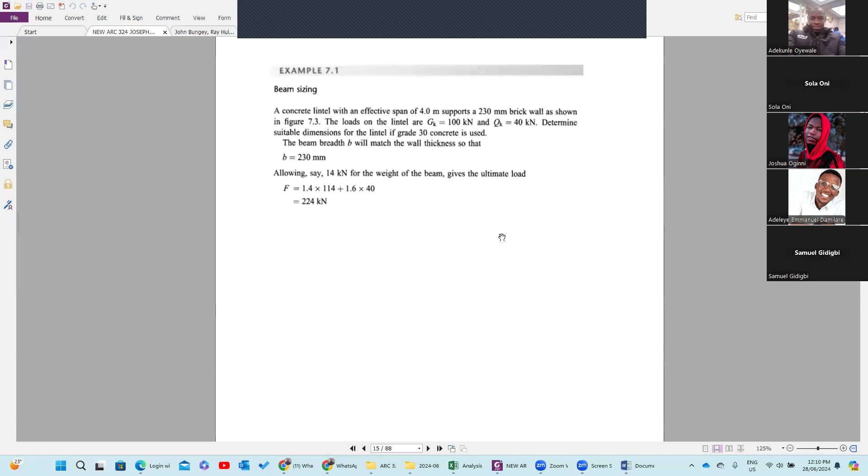Which calculation, for this particular question? For the cost? For the exam? Which calculation is much, if I may ask you? No sir, we are talking about the old textbook, not...

What? See, there's what we call curriculum. Are you getting me? Yes sir. In that curriculum, it is my duty to make sure that every aspect is covered. Are you getting me? Yes sir. But the...

Calculation - if you don't understand the calculation after reading it, that is why I'm trying to do this revision for you, because for a novice instructor it might be difficult for you. That is why I'm taking my time to open your BS 8110 to show you where those conditions are itemized. Are you getting it?

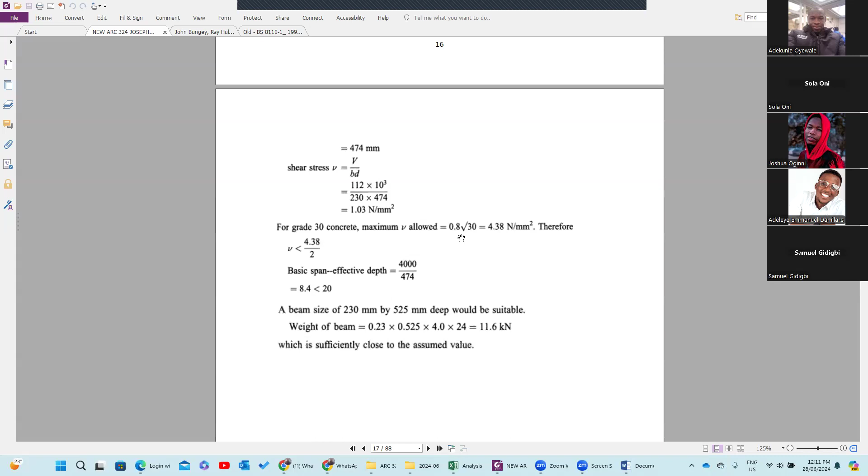The simplest calculation you can ever see in structures is for a simply supported beam. This is what I'm going to go over now. This particular one - that's the simplest calculation you can ever see in structure. Are you getting me? And we need to...

It's impossible for me to just ask you what is column, what is beam. It is impossible for me to just ask you a simple question like that. In structures, you must calculate.

So where should we focus on? The easiest among the calculations are what I'm just explaining to you, because if I should go to flat beam and those thick calculations, it might be difficult for you. But I have to just explain to you the procedure. Now when you read it, try and do some calculation based on what I've explained to you.

Do you understand? The example in the notes, can you try it? Can you do it? Can you solve those things? Can you close your book and solve it again? If you're able to do that, then I think the knowledge has sunk in somehow.

However, there's no way you will do without this particular formula, which is K equals M over BD squared FCU. It's impossible for you to do structures using BS 8110 without doing this. So you understand, that is the foundation of reinforcement in beams. And when we do the same thing, applicable to slab - beam and slab have almost the same condition. So you just have to know this.

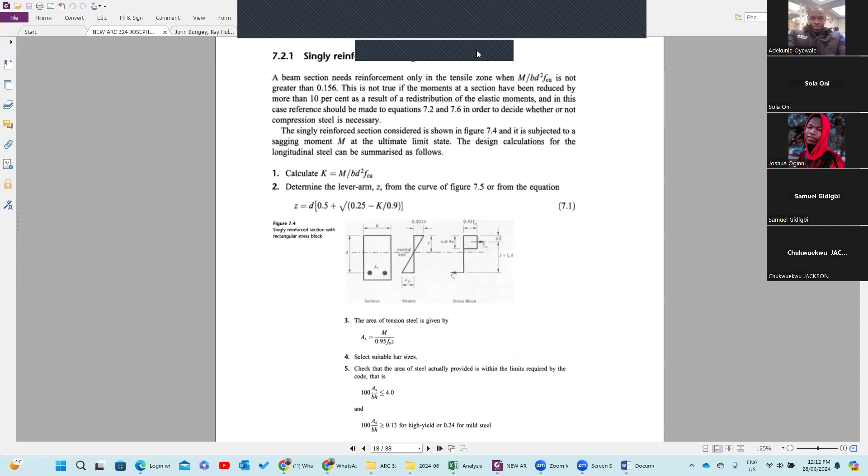Sir, please sir, the calculations are getting too much and are getting very, very confusing for us. Which one is too much there? Sir, I won't lie to you sir, if we have an area of focus, maybe a single question that is going to come out, we will be able to calculate and digest that one, because all of these things are a lot inside our head.

Bringing formulas, going to another PDF to check it out, coming back again - we can't really relate. We need a focus, sir. We are not structural students, we are borrowing this course. We don't understand it, I'm serious here.

So sir, please, if we can have a focus that, okay, this will focus on this, we will calculate and digest that question and we'll be able to bring something out, sir. Please, sir, please, we don't understand this. Hello? Yeah, so that you won't have problem - that is why I'm going over this for you.

Because I've given you the note already, I've explained this for you in class already. Why I'm giving this to you is so that you won't have problem, so that those people that missed the class can see it too, because we were about 9 in the class. That is why I'm revising this for you.

It's not convenient for me, it's just a sacrifice I'm giving into class. You understand? It won't do me any good if everybody in the class will fail. So you understand, but however, you see how I can make the course easier for you.

Forget the mindset that this course is hard. It's not hard, it's very simple - it's just a procedure, that okay, if you want to design this, this is how you calculate the weights, this is how you know the size you want to use, which is also applicable for what you will need on site. You cannot construct a building without having a lintel in your building, and you cannot do without concrete.

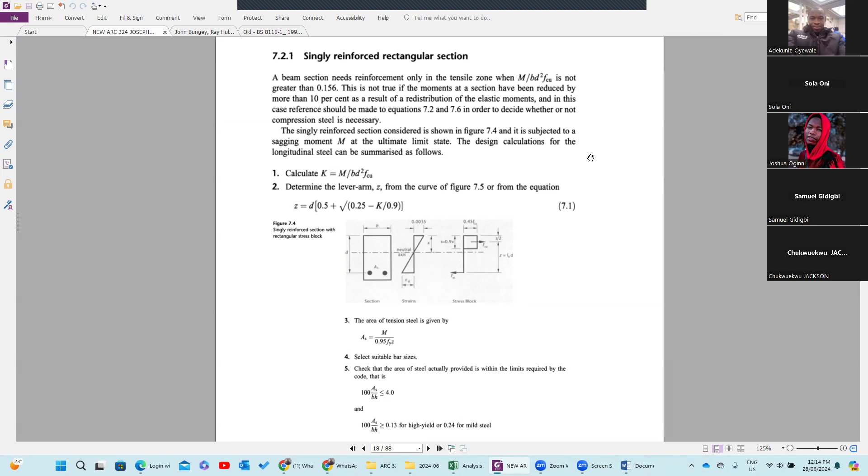You will need to know how the weight of this concrete is being arrived at. What if you go to the site and somebody just says, okay, provide 16 number bars of so diameter? If you don't know how to calculate it, how will you be able to vet it? How will they be able to put you as the quality assurance personnel to vet what everybody is bringing?

You should be able to know some basic things about all these things. So with this knowledge, there's no way you want to calculate for it and not know the amount of reinforcement that you will need. You don't need to panic. Maybe they say we don't have 32mm diameter bar in the market, you don't need to panic.

This course will let you know the possibility of using another reinforcement size and what numbers you need to provide. All the loadings on your structure - how will you know if this structure is being abused? If you don't understand the loading condition, how it is being loaded, how will you be able to distribute the load on each of those members? You are the designer, you should have the knowledge of what everybody is doing - the structural engineer, the builder, and the architect.

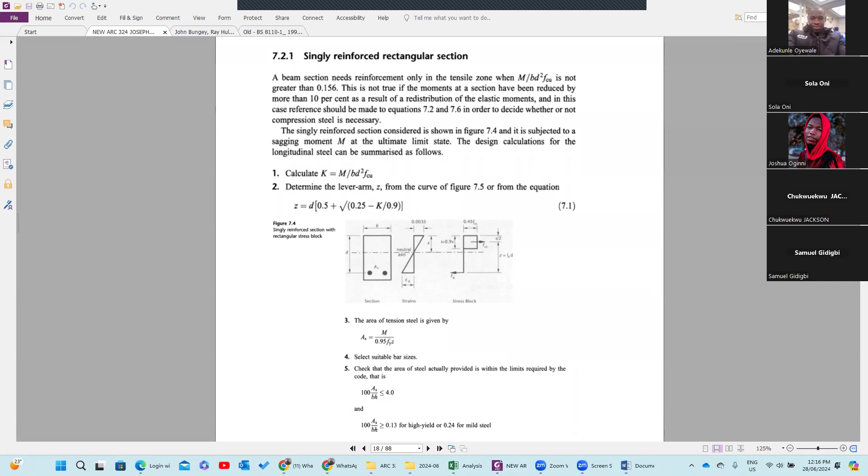That's why I have to put this to you. I can't just carry some calculation and give you some solutions - I'm not helping you that way. So you're not giving us solutions? Sir, okay, I'm actually saying that. So this formula, how do we tend to go about it, sir?

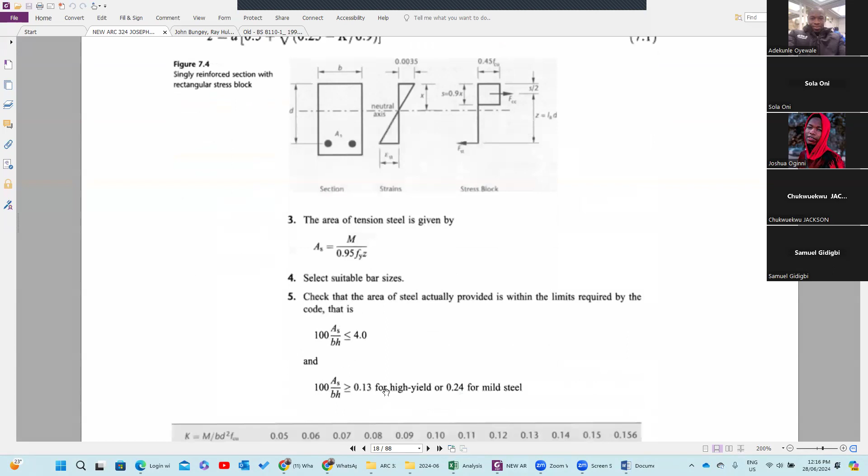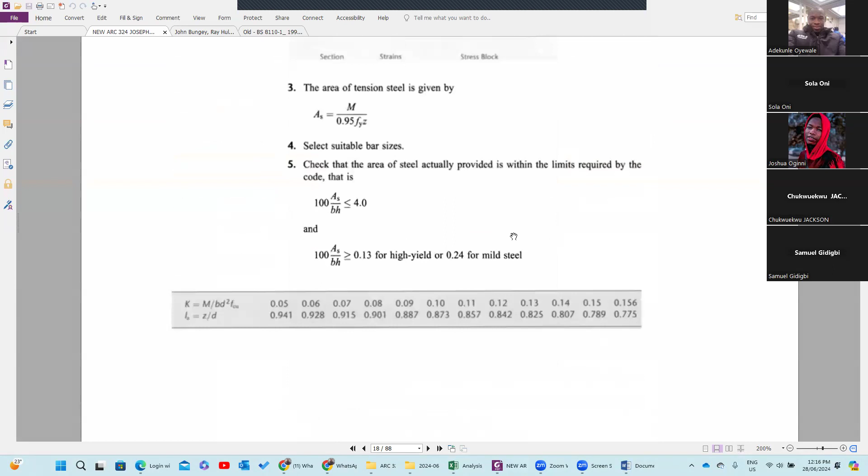This particular formula, number 1, number 2, number 3 - you should have it at the back of your mind. We should know that one. If on this one, you don't need to open a textbook before you know this, you must know it, you understand? These three - once you know these three, any other one that might be difficult, I will make provision for it, provide the other one for us in case you need to use it.

Now I want us to look at this example before time runs out.

Even look at the number of people in the meeting - it's negligible, almost 6 or so. And you can see, we are just 8 in number here. So you can see how serious your class is. And you are expecting area of concentration - me, I'm not giving area of concentration, I will do calculation for you. If you like, concentrate, if you like, don't concentrate.

So what do we need to do? We want to look at the tension reinforcement that is needed. How do we go about it? The first thing is that you calculate your K value, which is M over BD squared FCU. When you calculate it, whatever value you have, you will cross-check whether it is less than 0.156. If it is less than 0.156, then you know you don't need compression reinforcement - that is, it should be singly reinforced.

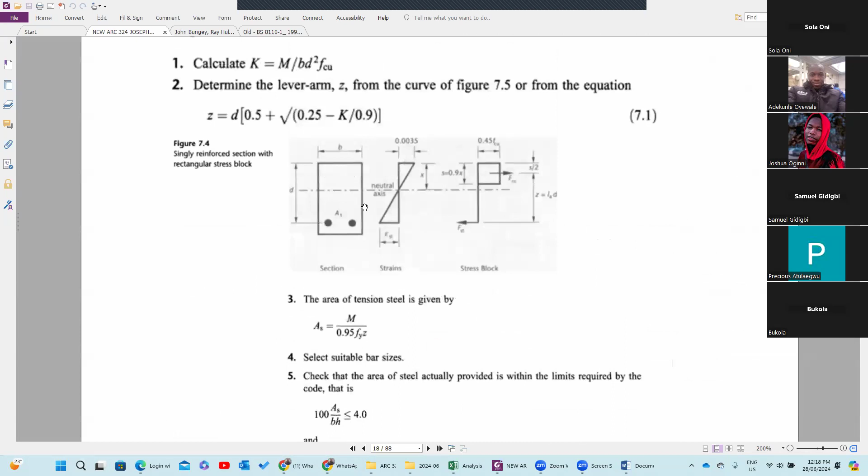Now this Z value - which is the formula that I told you - D into 0.5 plus square root of 0.25 minus K over 0.9, this formula. Now you see this Z value, how did they arrive at it? Look at this chart we have here, you can see from here to here.

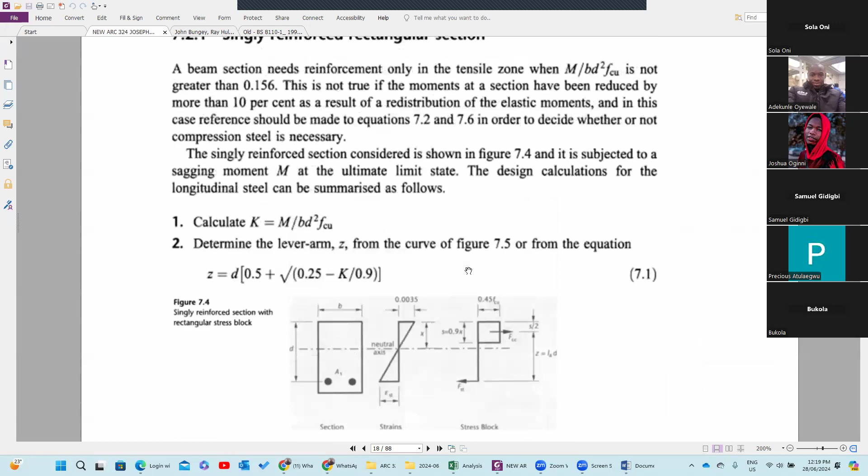So please, how did we arrive at the value of M? M is your maximum moment. If you have a simply supported beam, any beam you have - are you getting me? Let's say you have a beam and it's not loaded initially, you can calculate the weight of the beam, right? I explained to you in the first lecture how you can calculate the weight of a beam.

Before we went on break, I told you how to calculate the weight of a beam. That means you didn't attend the first segment. No, sir, we've been here since, but we didn't recall that. That's the first explanation I did, and I even wrote some things on the board.

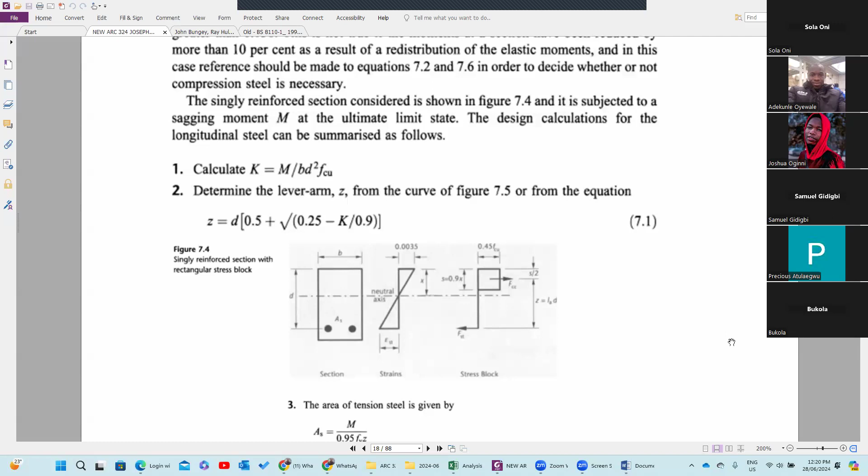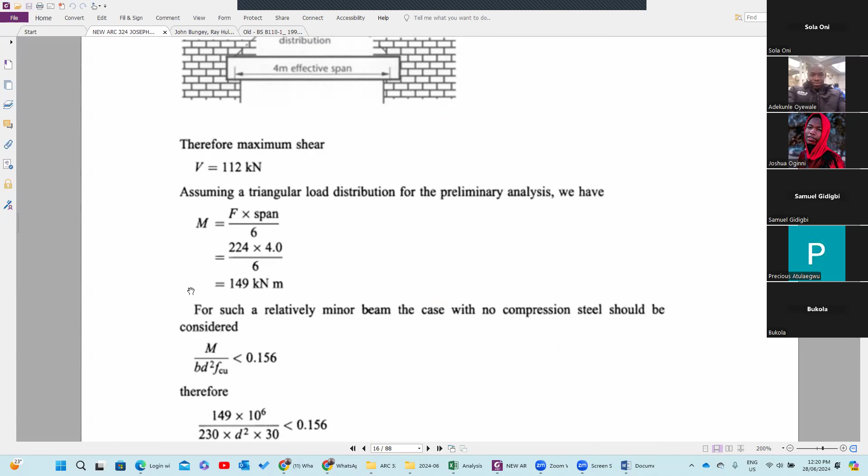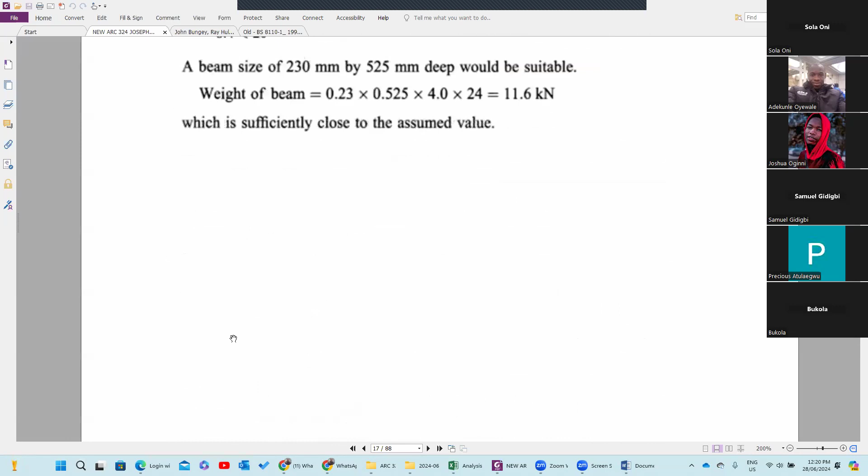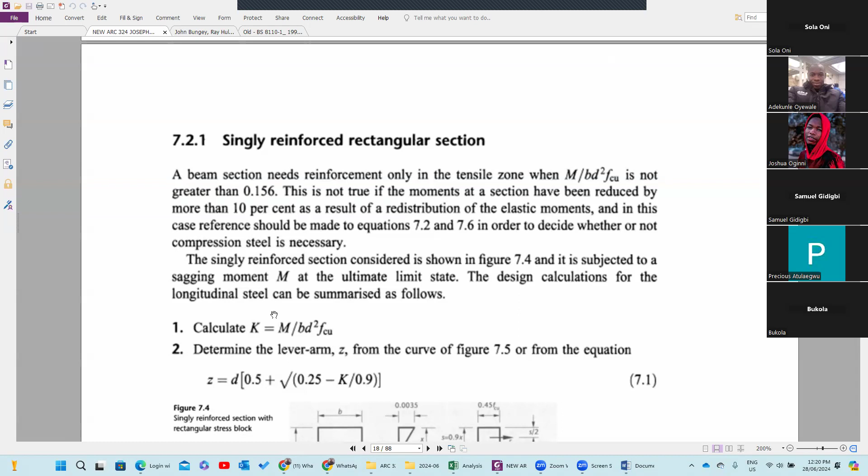So if you know how to calculate that weight, definitely you know how to proceed. I explained how you get your moment based on this, for this lintel. If I told you how to calculate this, and from here how we arrive at this moment, I believe others will be easy for you. That particular procedure, in a situation whereby you're on site and need to calculate the weight of this beam, that's the procedure you follow.

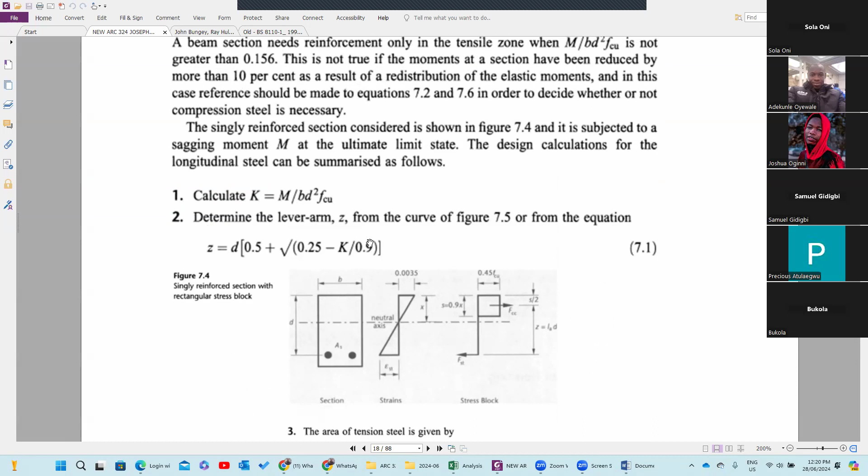You will know how to get the maximum bending moment. For a simply supported beam, you can say WL square over 8, which is always the general case. But if you don't know how to calculate that W, you are wasting your time. That is the first thing I told you: 1.4GK plus 1.6QK. You have to know how to calculate that particular one.

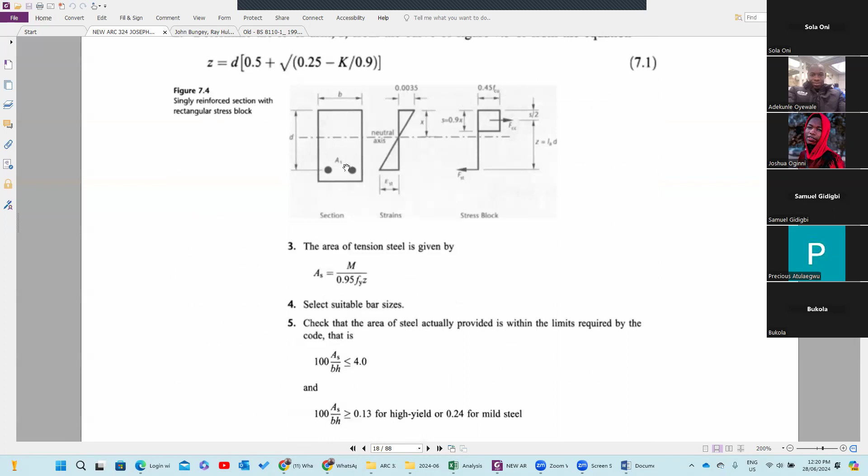All right, sir, we'll go with it. Somebody is asking a question.

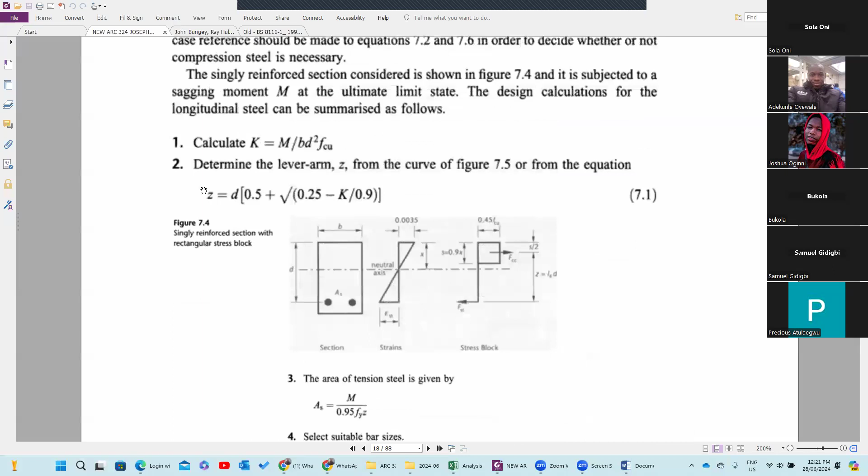For this particular one, we calculate our K. Here, we have K to be 0.1. What is the next thing after K? It's our Z value, and I told you that this Z value ranges from 0.775 to 0.95. The maximum value is 0.95D. So when you calculate it, whatever value you get in your Z formula, you check: is it greater than 0.95?

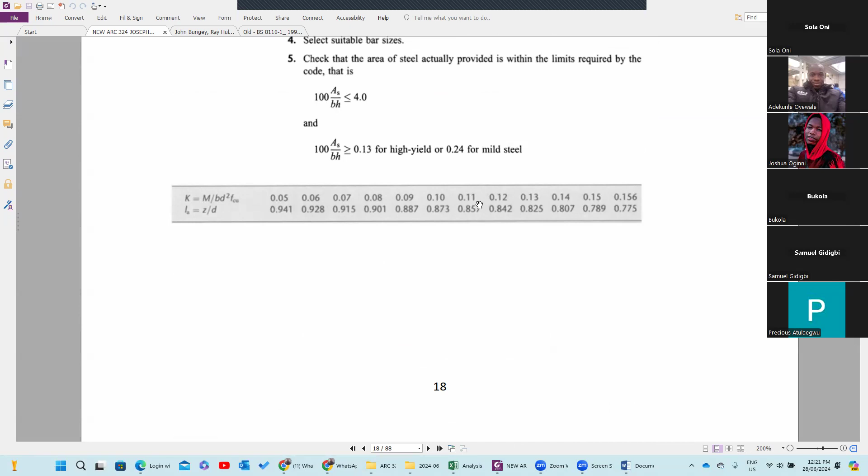This table you are seeing here is just a series of Z over D, and it ranges from this to this. Maybe if I have 0.1, I just use Z to be... they got it from that formula. Now when you calculate it, your Z value is this 426 millimeter.

After getting your Z value, you calculate your area of reinforcement, which is your AS. Your M given here is this. Just put it divided by 0.95 FYZ. FY is given, your Z value is what you have here, times 10 raised to the power of 6. Why are we putting it?

Eyoza, you are writing on my screen. Eyoza, can you erase what you wrote on my screen?

Let's look at it this way. Your AS equals M over 0.95 FYZ. You just put the value of this, and I told you this one is times 10 raised to the power of 6. Why? Because we are converting kilonewton to newton and meter to millimeter.

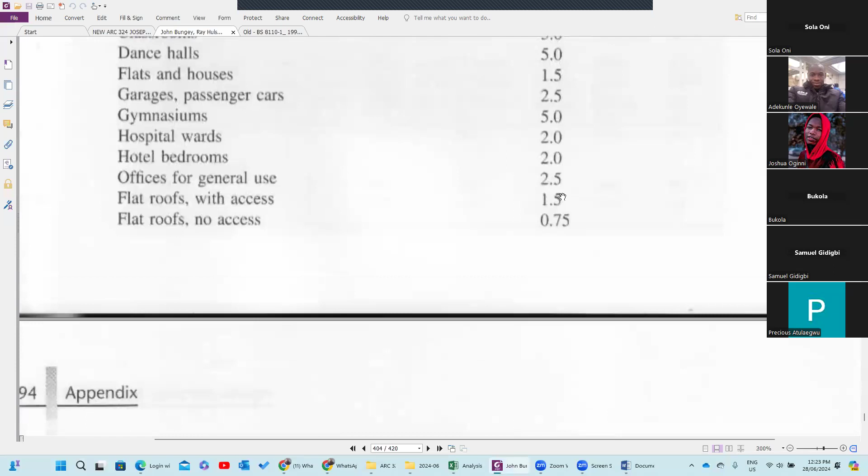This our FY is in Newton per mm square. We cannot be working with Newton per mm square and be using the other unit to do our calculation. They have to be in the same unit, and it is easier for us to turn this one to Newton millimeter than working with kilonewton meter. So once you arrive at this value from this calculation, you look at your table for your steel reinforcement, this table.

We want to use a 25 mm diameter bar. How many 25 mm diameter bars will I have in 886? 886 is between this and this, so I can provide this because it is higher than 886 millimeter square. That's better.

We have 886, we come to our steel manual, then we provide a value under the 25 mm bar. We don't have 886 here, it's in between these two, so we provide the next one, which is 982. This 982 is what we're now saying is the new area. Even though this is the AS calculated, this is the AS provided.

Now there's what we call the minimum reinforcement that is needed, and the maximum amount of reinforcement. When you are dealing with high-yield, the minimum amount of reinforcement is 0.13% of BH, and the maximum is this. Your reinforcement should be in between these two. So how do you do that?

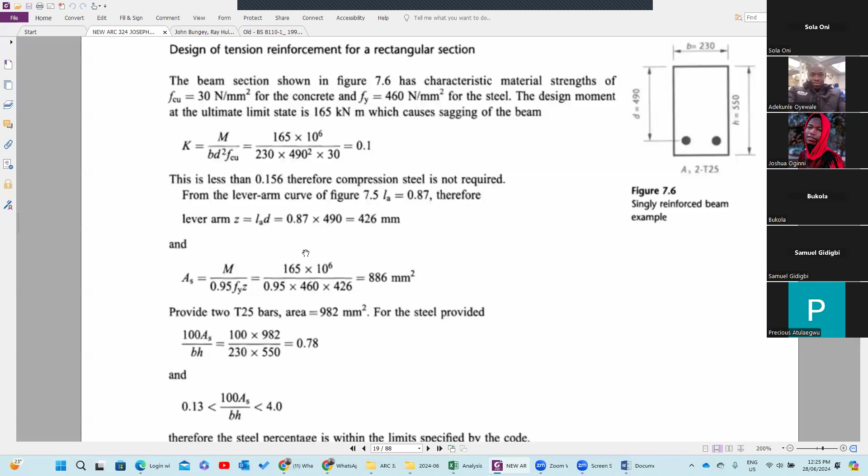I don't need to waste my time on this, it's very simple. Any question on that?

Any question on that?

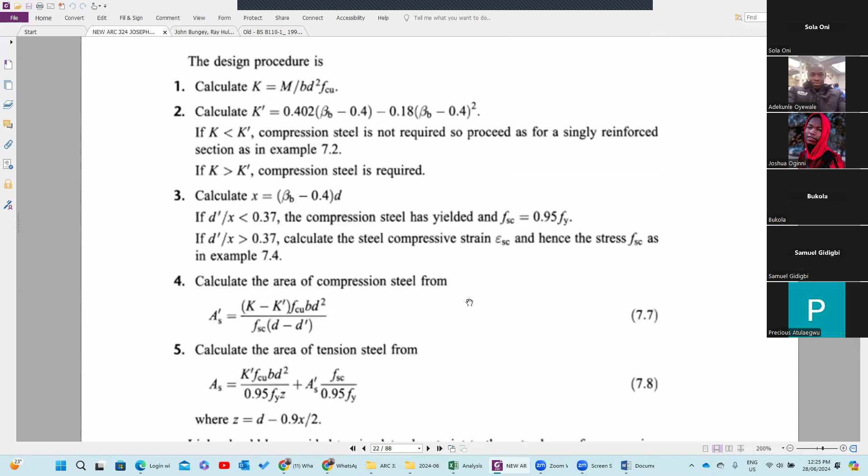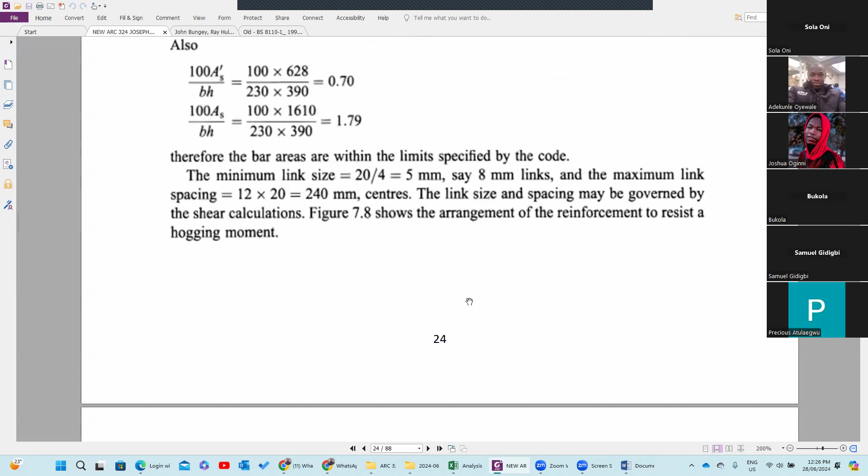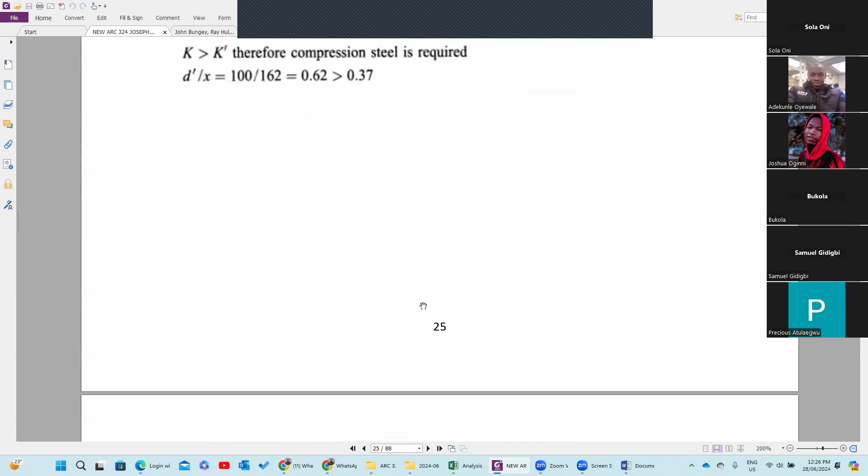Question? Yes, sir. Okay, what we're trying to talk about was... thanks for coming, sir. Hello, go ahead, I'm listening to you. Yes, sir. You want to check it out, you want to check the question out.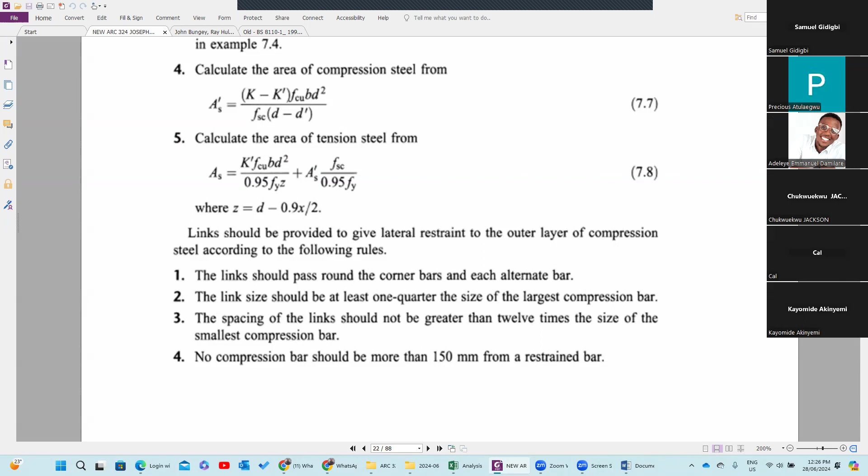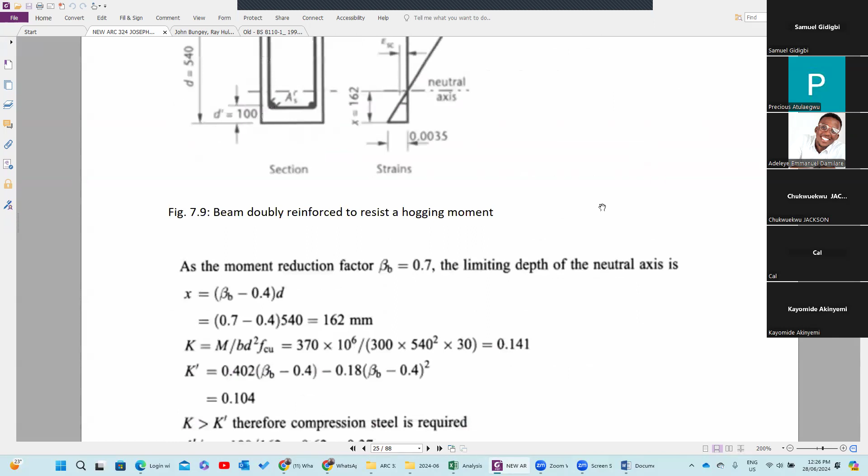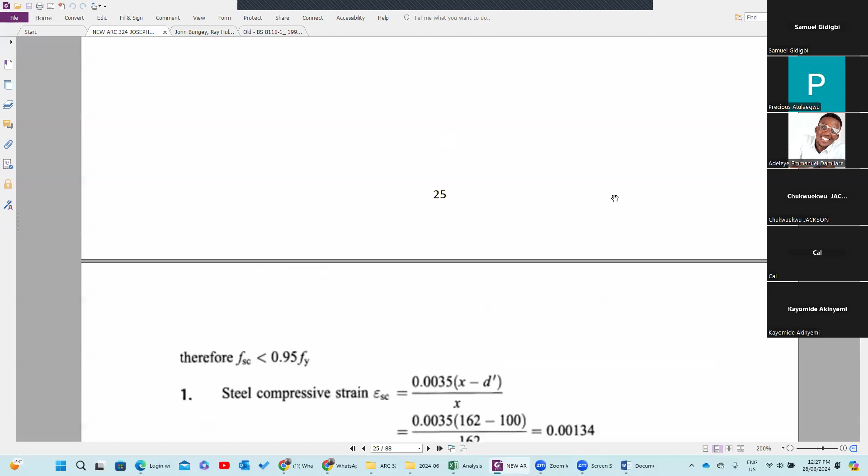So, apart from calculations, are there any theory things inside this handout? Yes, I will add some theory to it. But I always like theory to be on its own and calculation to be on its own. Yes, sir, so we are here.

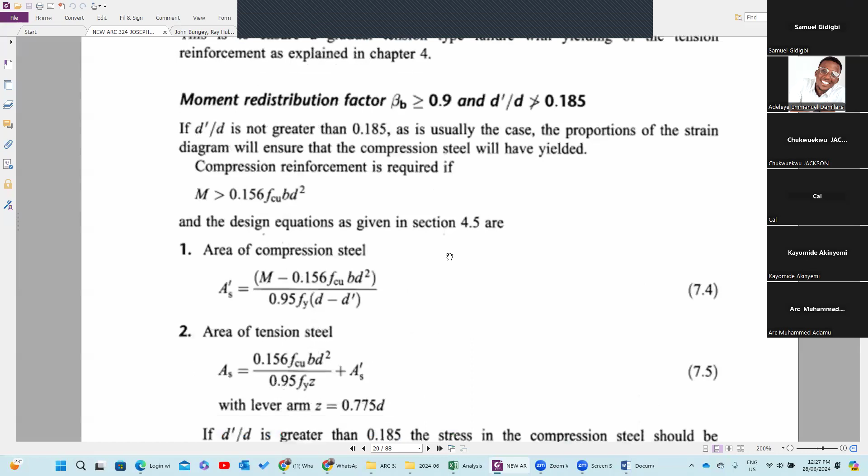That's all, any other question? What is the other question that you have again? Sir, so in the last question, that single reinforced rectangular section, we were wondering about step 5 that says check the area of the steel actually provided within the limits required by code.

Yes, that 982. Why didn't we use 491? Yes, why didn't we use 491? Okay, it's like we are saying you are in higher institution.

You entered Jabu in 2022, and maybe you are in 300 level now. How will you feel if you are taught a 200 level course and you are being asked questions meant for 400 level students? What will happen? I'll feel bad. The same thing, the structure too will fail. The same way the student will fail, the structure too will fail. If you are under designing, the structure will fail. If you are over reinforcing, there won't be enough concrete in the structure, and the structure too will still fail.

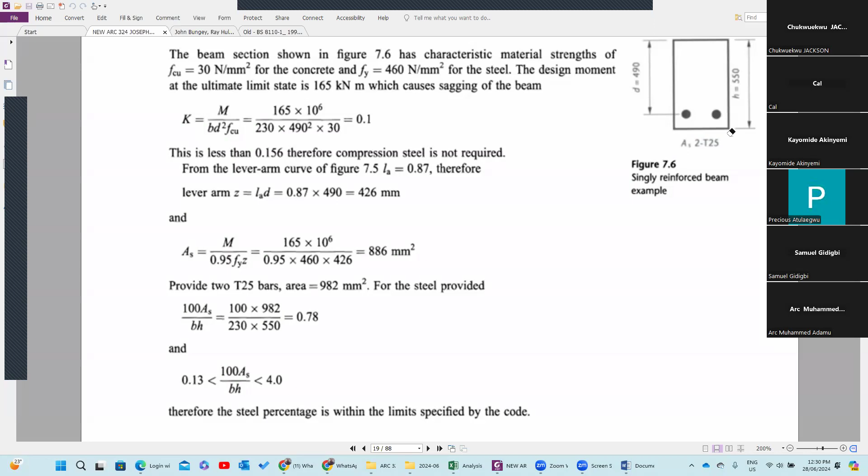Okay, so sir, if this diagram is going to be given to us with the dimensions, is that if this one is coming out, as if it's coming out, will it be given to us with the dimensions? If I want to give you this, I will not give. I will just give you this.

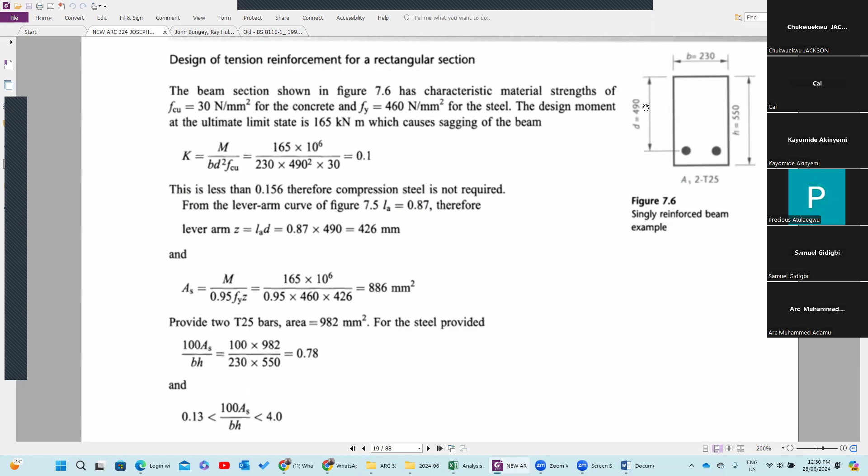I'll give you just the diagram, and I'll give you the diagram like this. If I want to, I'll give you the diagram, and I will not give you this one, I'll give you this one.

Sir, where will we not get the depth? Okay sir, because you can calculate the depth. Let's get the question, let's go and solve that. Please sir, we have exam by 1, if you can just help us and give us the question that will come out. Are you saying you cannot calculate D when you have your H?

We will get this D now, it's going to stress us. So how is it going to stress you? Because I have given you the formula, and Ogeshi, or whatever her name is, that lady last week, she even asked, is this one constant? And I said, as far as beam is concerned, it is constant.

d equals to h minus cover minus link minus half of the diameter of the bar. I think that's what I told you, and you can always see it here. It's very simple. Once you know your cover, and if you're not given cover, use 25mm, which I have told you already. Whatever diameter of bar you are using, I've told you the minimum link that is needed, which is 8. What else do you need again?

Okay sir, there's one more thing. Sir, we're not asking you for your question, ask your question now. We just want guidance, like okay you have 5 questions, number 1 is compulsory, and this is where you should read for. I don't have a compulsory question. Point of correction, no compulsory questions. Okay, so number 1, just know.

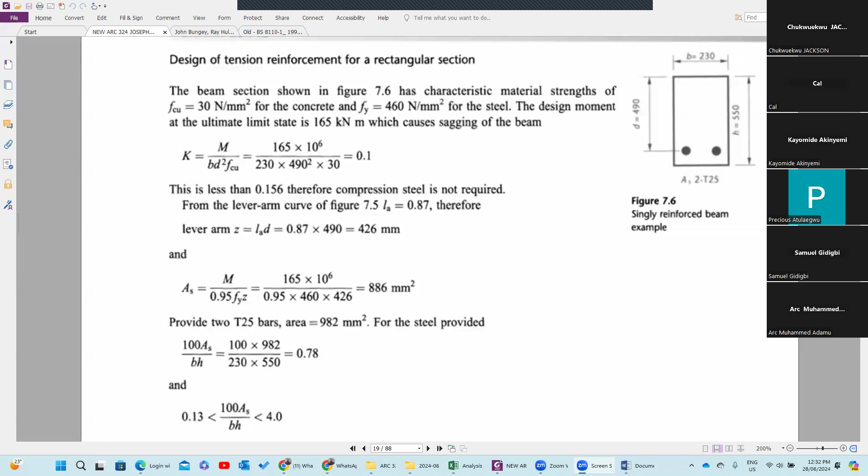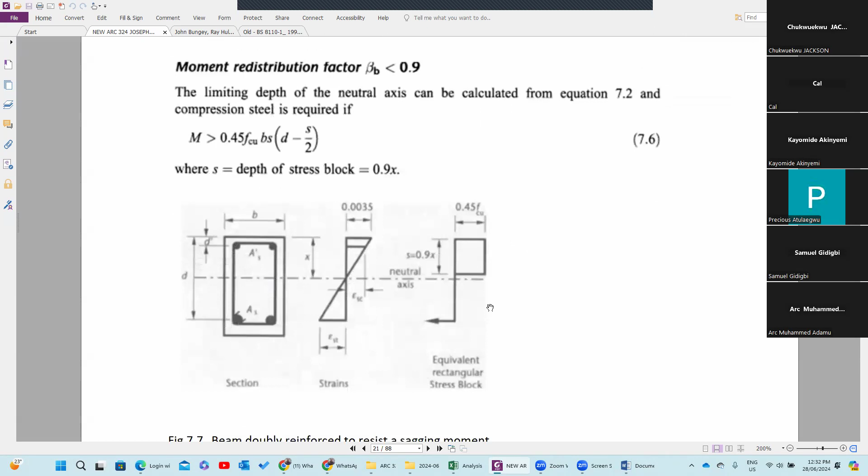I will only guide you. Sir, you don't want us to fail. I can't tell you what will come out, I will only guide you. If you see something like that, I can only tell you this is what you should do when you have this kind of scenario. I can't tell you this is what will come out. And if I ask you double reinforce, then I will give you this formula.

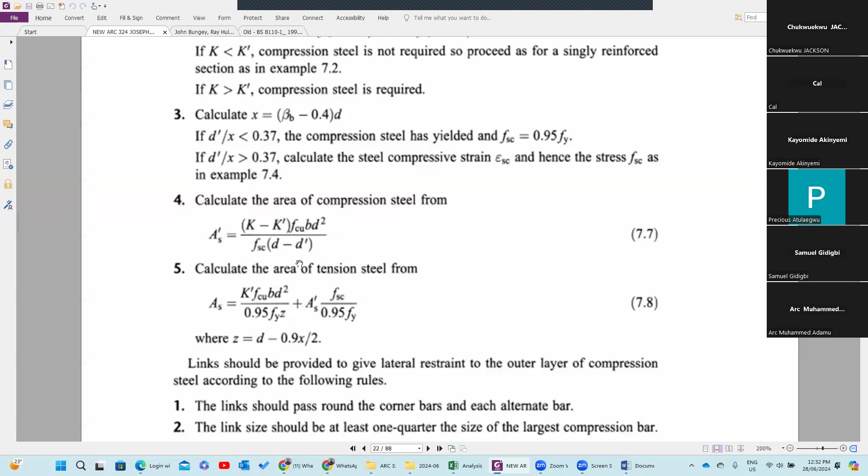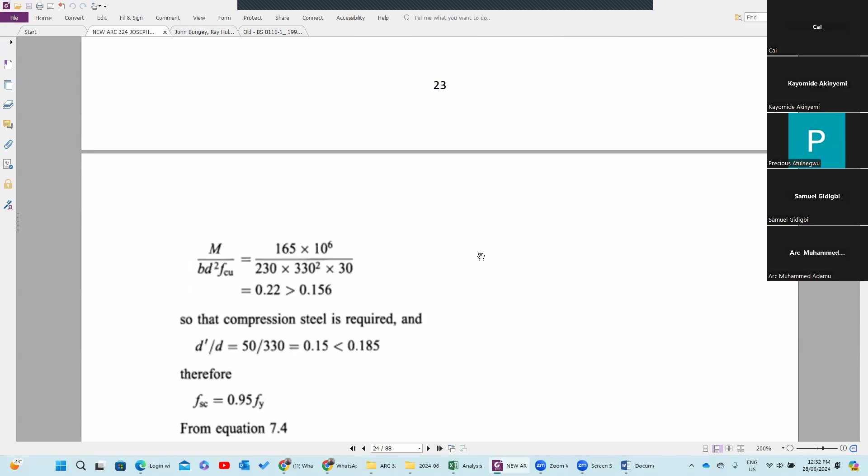An average PDF we are reading for this semester is 55 pages, so imagine we have like 940 pages to read for this exam. It's not fair, it's not fair. And we are going to do calculations, put formulas that we don't know where they're coming from, so the last time we did something like this, it was not a nice exam.

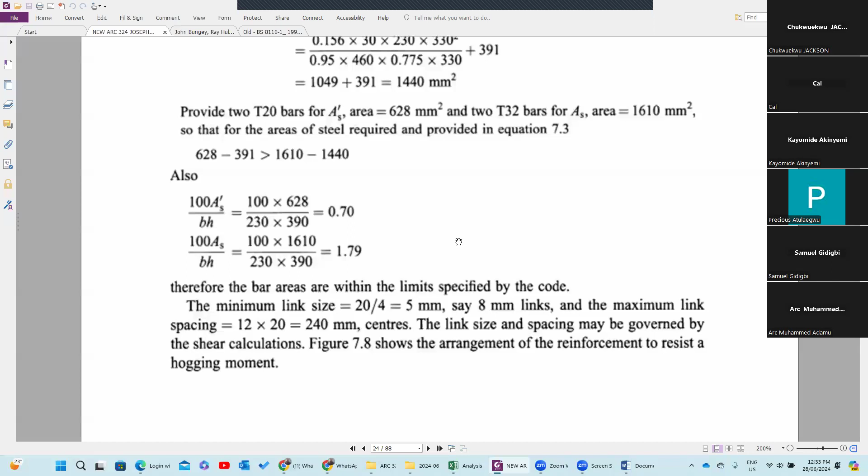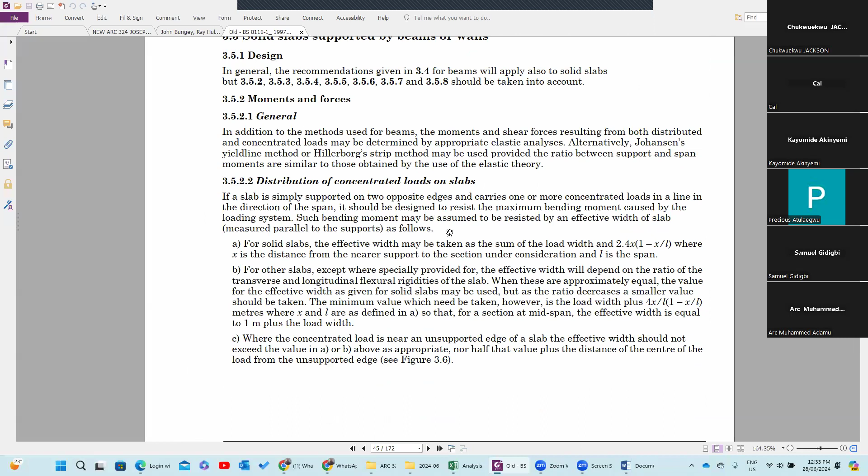So when we get to site, we'll learn all this. I told you the calculation is coming from this textbook, this BS 8110, and I've shown you exactly where it is. This is the textbook you just moved to now. We got some values here that we are using in our calculation.

The only thing, even this table, I've explained to you how to calculate your area of reinforcement if you don't have this. Yes, I understand this one, I understand how to use this. There's nothing you need that I have not provided for you. It's just the only problem you're having is that you are scared of nothing.

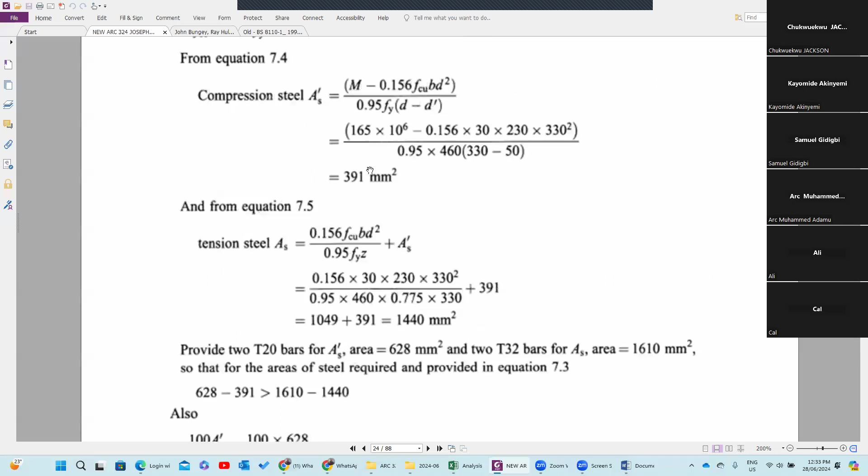Sir, it's not nothing, structures should not structure us inside the exam. So it's very simple, very simple. If you attended all my classes, and even this morning if you did the tutorial, that would even refresh you on what I have taught already.

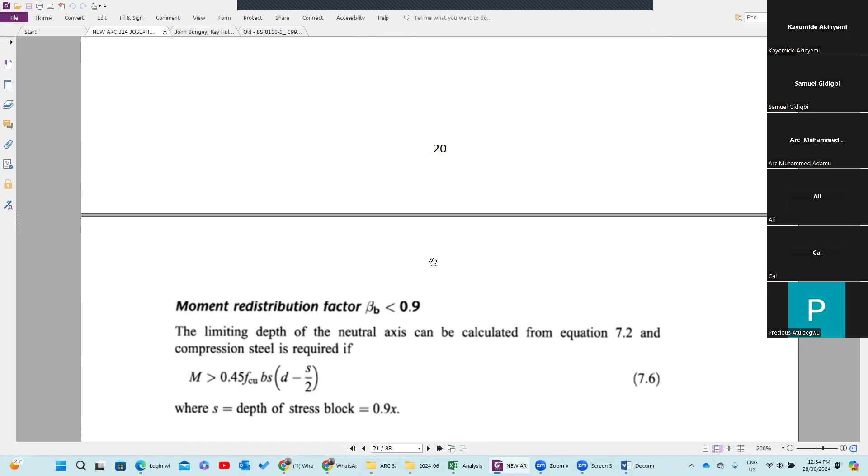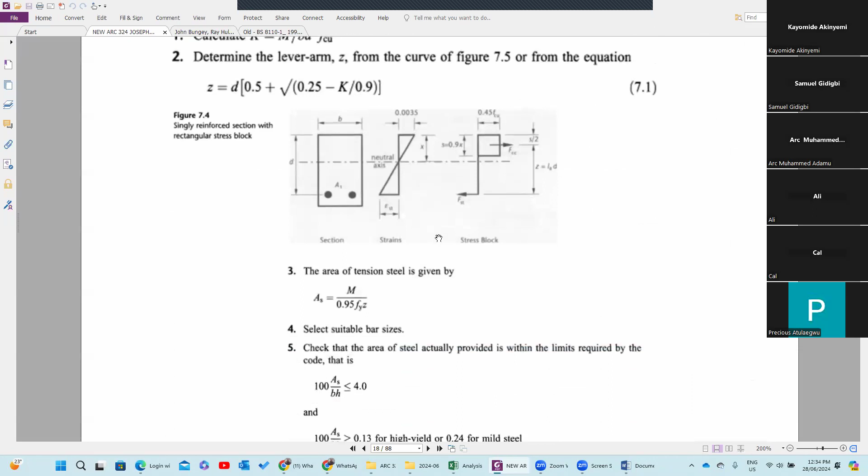So I don't think you should have any problem. So what are they calling it? Because when we go this morning sir, please wait here. Oh my God. Sir please, can we go to page 20? Please, okay, just one question there. The, we are here, we are there already. I'm there already, yes.

Hello? Hello, sir, can you hear me? I can hear you, yes.

Yes sir, so you know this place says provide 2 T25 bars. So after our calculation, we have finished, we must always say provide 2 T25 bars because I saw that it's not changing. Is it the area that changed? See, provide 2T, you must always provide what after calculating this. You must provide, it's compulsory for you to provide.

Are you getting me? And this one is not compulsory that it is T25, you can use T20. Are you getting me? But why this placing is... that's the part I don't understand, because how did 25 reach here now?

See, area of reinforcement, see the most important one is for this, the diagram, but then it's not giving us the area of reinforcement. See, hello, oh God, hello are you getting me? Yes sir, this one, no I'm not getting this one sir.

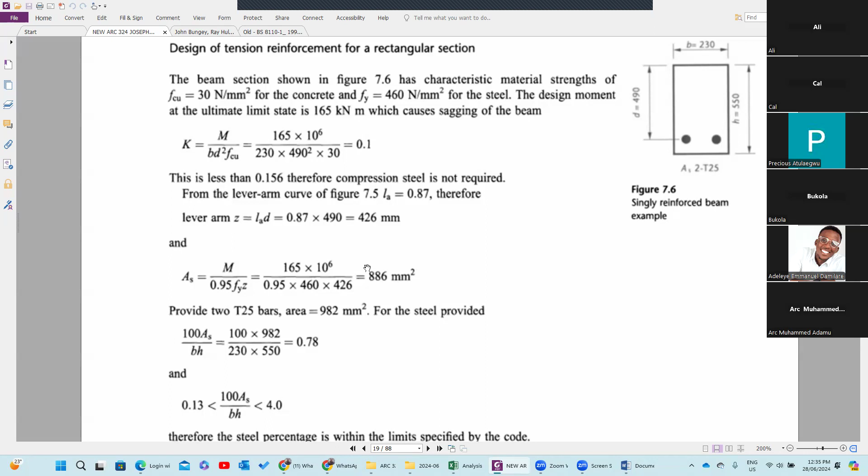It is after getting this that they are putting this here. This one will not be in any question, this is what you are calculating for. This is what you are looking for in your beam that you want to design. You don't know the number that you will need. Now it is after doing the calculation here that you arrive at this. When you arrive at this, and I told you that you have 886, that is the area of reinforcement you need. Now you come to this table, look at this table.

As big as it is, we have 6, 8, 10, 12, 16, 20, 25, 32, 40 bars. These are different bar sizes that you have in the market. Now, from all of them, it's not possible for everybody to use the same size. Somebody might say, I want to use 20, someone might say 25, someone might say 32.

Now, if you are using 20 based on our calculation, how many bars do you think you will need? Because our calculation gives AS to be 886. So how many do you think you will need under 20 bar now? We need 3 number of bars. Under 20 bars, how many numbers do I need? Please, 1 number, 2 number, 3 number, 4 number, like that.

Is it 2 number of bar? Y20 now, okay, we are using Y20 to be 3 numbers of bar. We are using under 20 diameter bar, how many are we going to use? 3. So if I'm using 3 now, the area of 3 is now 943.

Now, what do you think I will provide here? I'm going to provide 3 T20 bars. Can you hear me? Oh, Father, what, yes, can you hear me please? Yes, sir.

Under 20 diameter bar, you have 943 which is higher than 886. Now, this 943 square is for 3 number of T20. Here, I'm going to say provide 3 T20 bars. Area equals to, I think this area equals to 943 square. That's what I will have here.

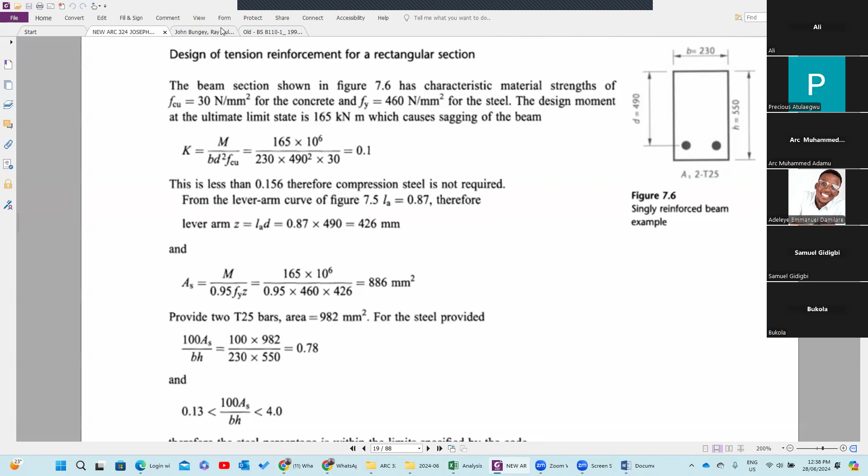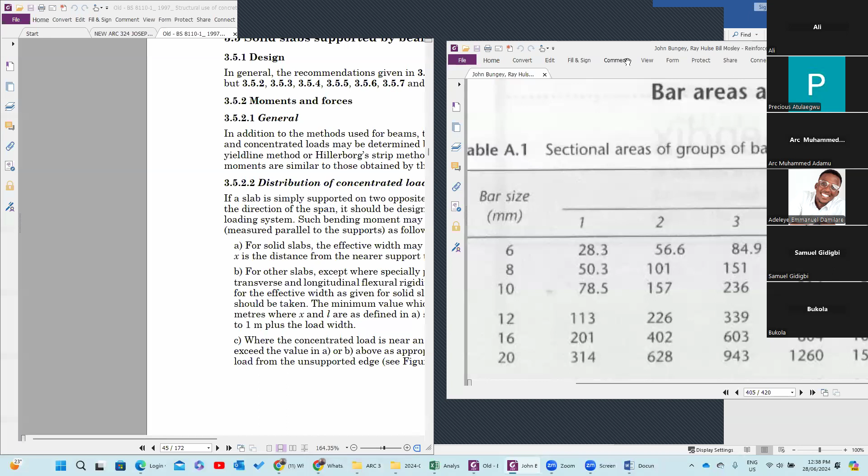My time is running out. Wait, down to this list. I'm with you, that's just one. Sir, I'm with you, you know. My company, I don't, God I beg. You said? I understand how you. No, I don't understand, I will not lie. Which one is it that you say you don't understand? This line, after we got 886, so where are we?

Can you see my screen, please? Our AS is equal to 886. Yes. When our AS is this, are you getting me? Yes, sir. Then now, how many? We're going to say, okay, this is the number of bars we need to provide.

Under this, we look at 25. 491 is for a unit number. And the area we're looking for is 886, which is in between these two. I said we'll provide the next one, which is this 982. If I'm using 25 diameter bar, that's why we have 982 here. This is 982, this is 982 here. But if you are using 20 diameter bar, you are going to provide 943 as against this.

So is it our choice, or if we are supposed to wait? What's going on, am I the one choosing it? Will I say, okay, provide T20 bars, then I'll now say the area is equal to this? Yes, you are the one that is providing so this, you are the one providing this because this is the only thing that anybody will calculate out. You are the one that will say I'm recommending this for anybody.

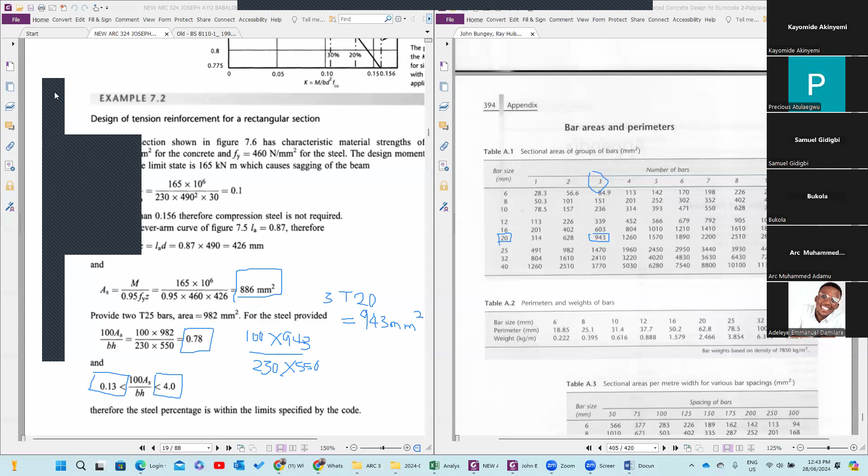this value, this 0.13 and this 4.0, are they constant that we will always put into our 100 AS over BH? By God's grace, that is a constant. If you look at your notes, that is what we have here, this provision we have here.

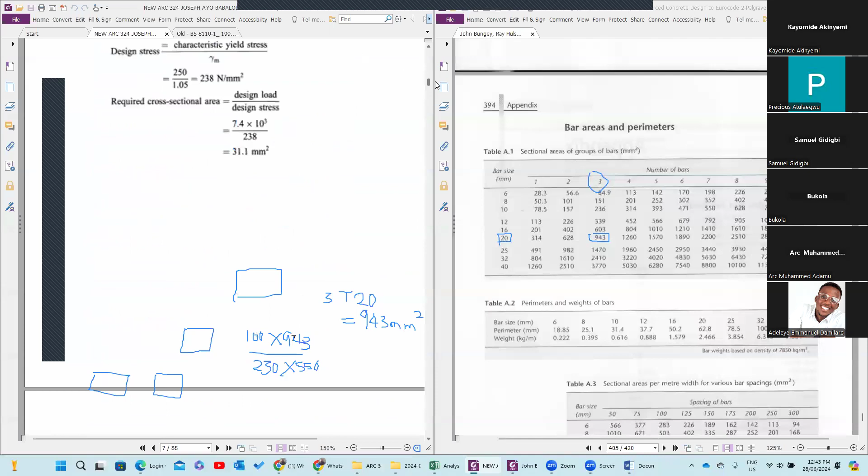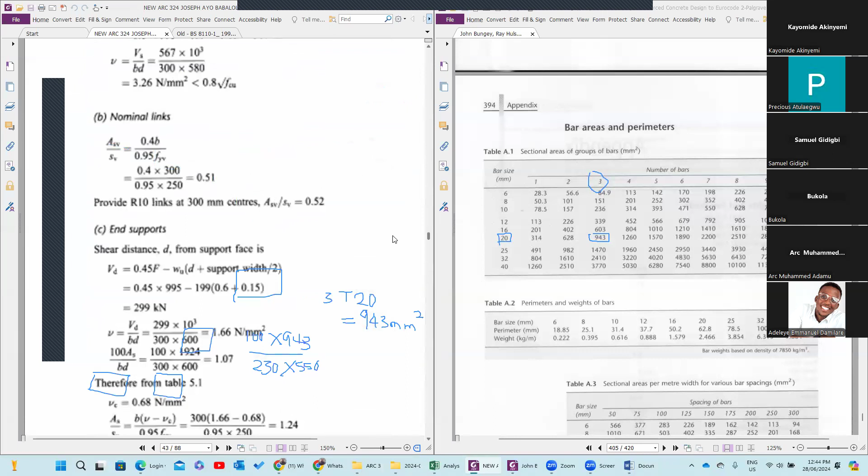Okay, sorry again, this 230 and 550. Yes, where is it? Let me just bring out something here, this one.

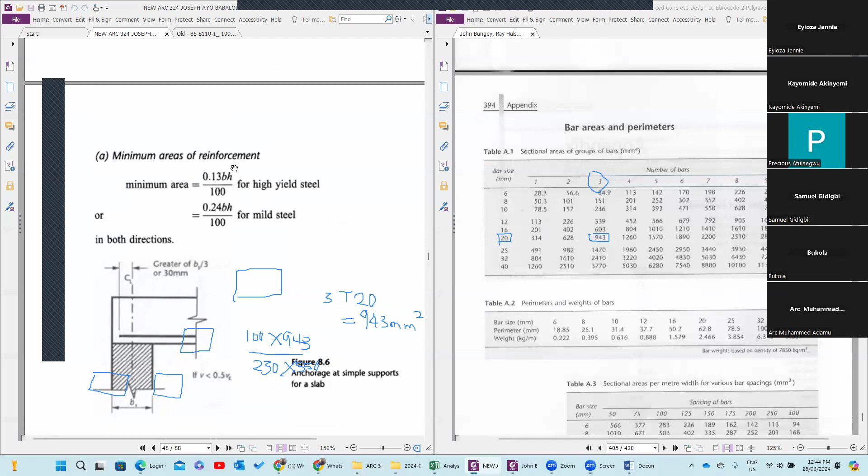Yes, look at this. Minimum area of reinforcement, can you see it? 0.13, 0.24. Can you see it now? That's the minimum. The maximum area, that's what we have there.

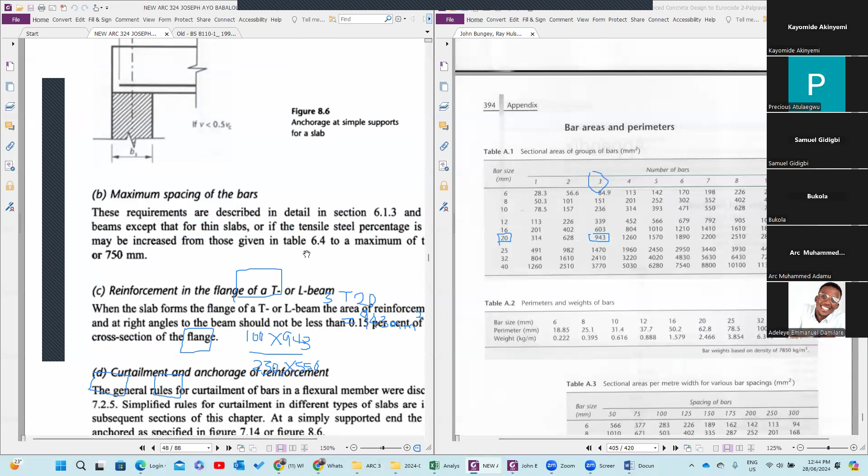And the maximum area depends on whether it's rectangular or this thing, which is 4 and 6. I told you that it's in your notes.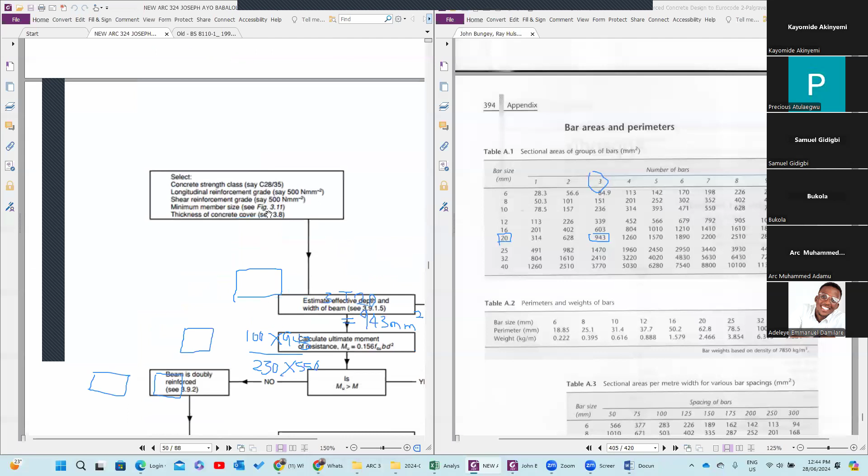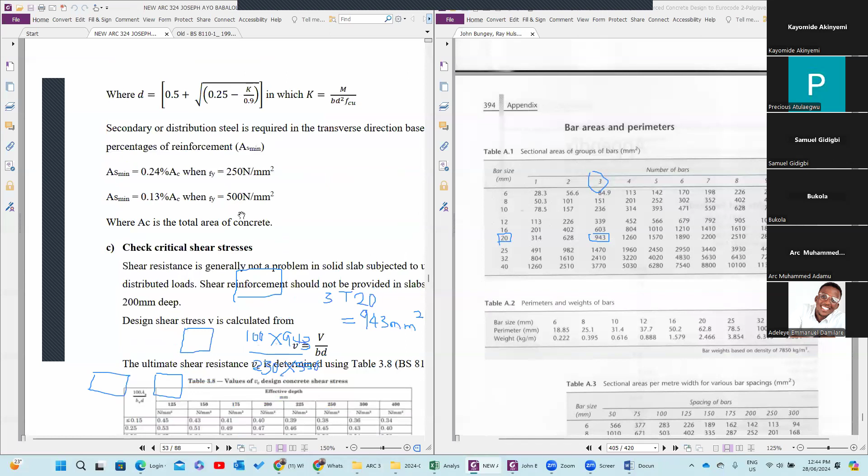This one is your note, you can see it. Then, is it part of the question, or should we just know it?

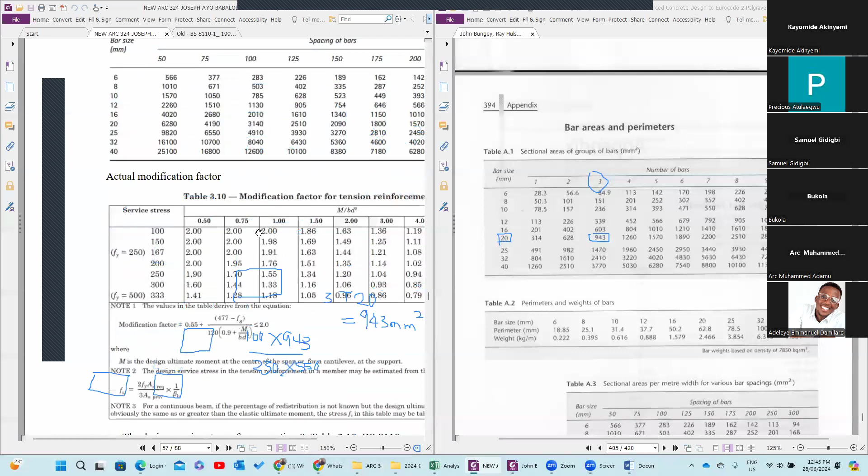If, how are you going to tell somebody that what you have provided is okay? How are you going to tell somebody that what you have provided is okay? That is, let's say, it will not fail.

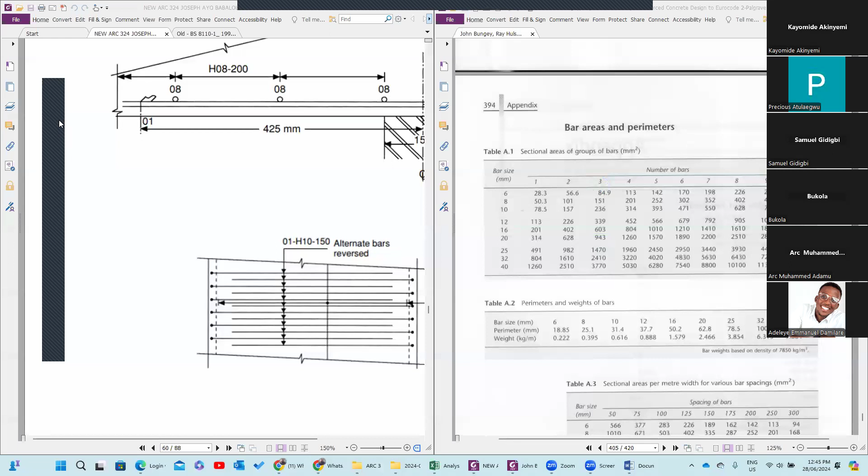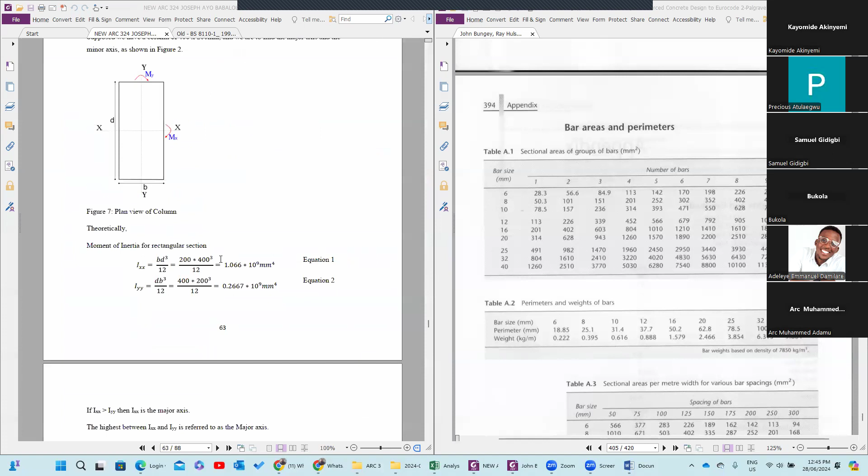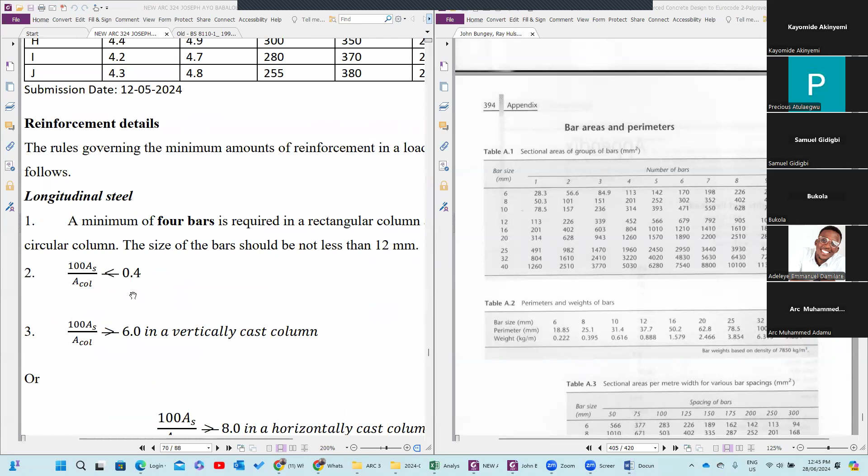Yes. You can see this, you can see this. All these values, you have been told from the beginning.

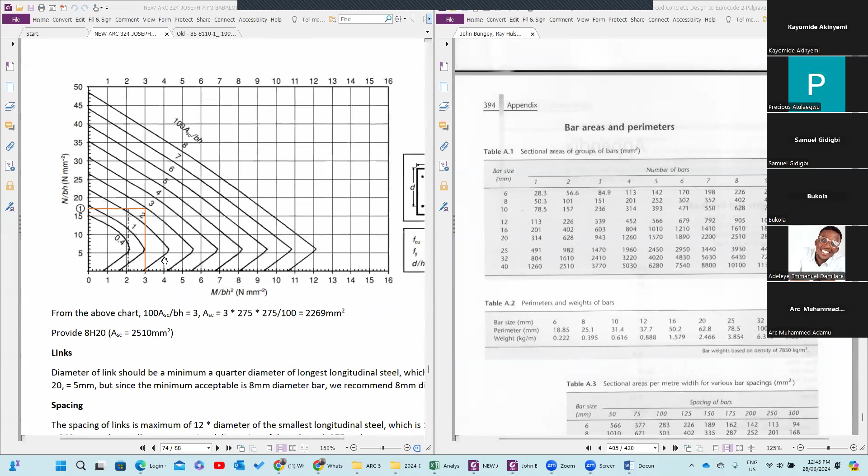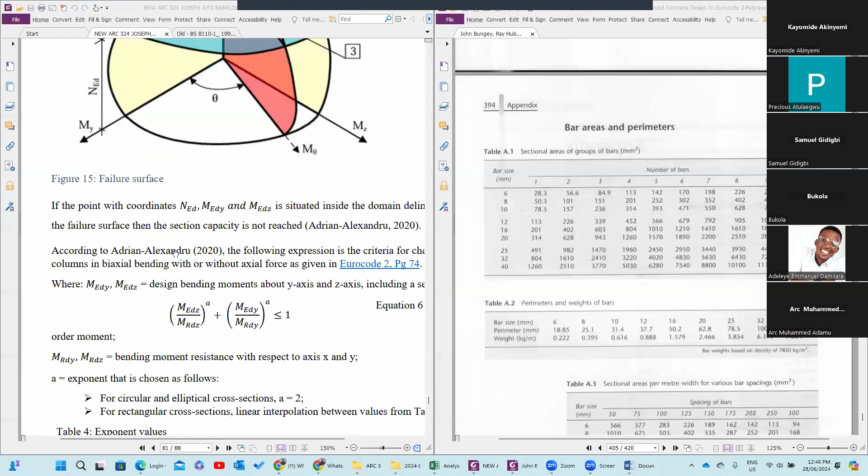All these things are very simple. There's nothing new in all these notes. Everything is what I've explained. We have explained almost everything. Even today, we have said everything today now. All the calculations have been done today.

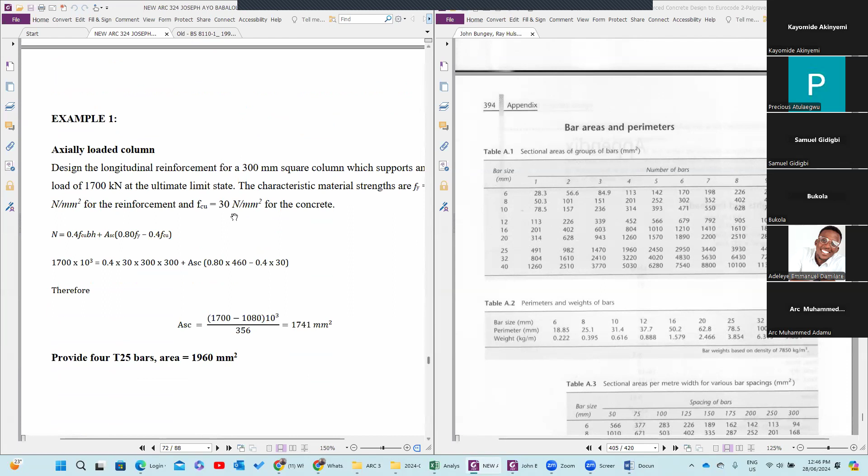All you just need to do is, you are given this. I've explained this in class. Yes, you are given this, then you calculate - this is your U or your N, this is your area of column, 300 by 300, this FCU, this FY. So we have 0.4 FCU BH plus AS into 0.8 FY minus 0.4 FCU.

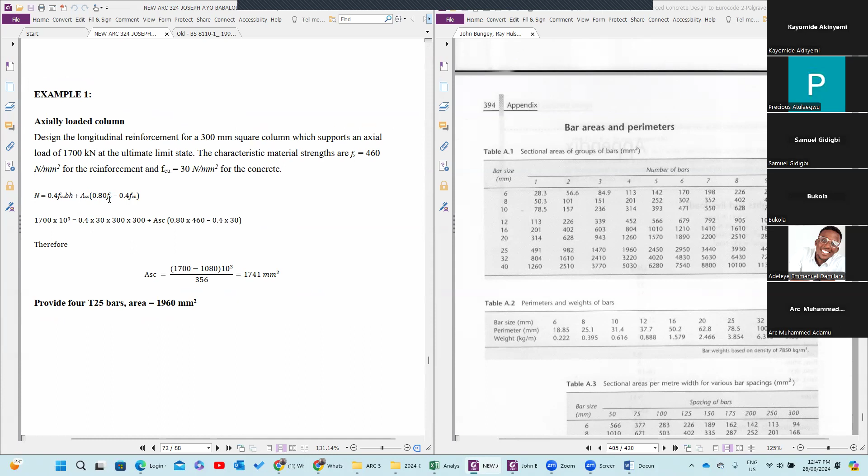This B is 300, this H is 300 for this particular case. So ASC is what you are looking for, area of reinforcement is what you are looking for here. So you substitute other values - this is the only one that you are looking for, and then if you come out here, then you have the area.

So the same thing is applicable when you have this area - you are going to look at this side, area of bars again. We have 1741, which is in between this and this, 1741. So I cannot provide this one because this one is lesser than 1741, so I provide this one. So I will say provide 4 of 25. 4T25, and the area is 1960.

Is it not too simple for 300 level students?